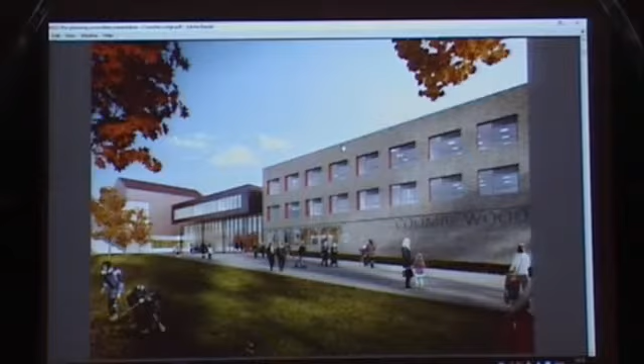Just to point out, there is a model that's been brought along. If the chair is agreeable, I suggest the applicant gives their presentation and then one of their team can talk members through the model itself. I'd ask that questions are delayed until members sit back down, because it's a public meeting, so everybody in attendance can hear the questions, if that's okay, Chair.

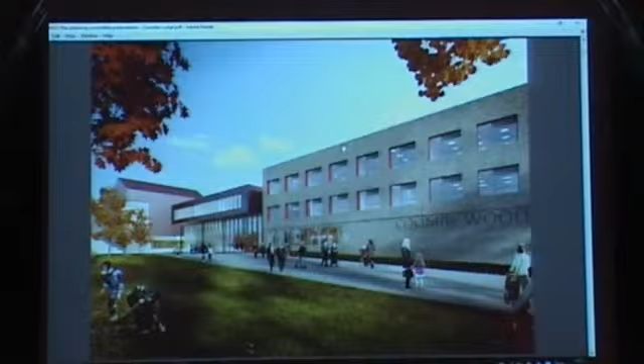But before I hand over to Sophie, I wanted to briefly put on the table the context for this. This is a journey we embarked on before Christmas. We've had a series of client engagement meetings which have been very instructive in terms of the finished presentation. We've been before the PRP, received their feedback, and had a series of pre-application meetings with your highway design and transportation officers. We've met with Sport England, and as Ross referred to, we had a fairly good public drop-in event last Tuesday, and we're still distilling the responses from that.

But tonight's a key step forward. We really want to hear how you view the proposals, and that is another step in the direction of putting a final scheme forward for planning. So, Sophie, over to you.

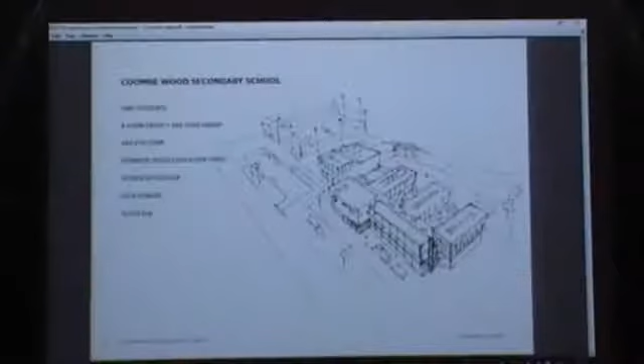The proposed school will have just over 1,600 students. Its sixth form entry will be 480. Each form, there will be 8 forms per year with 240 pupils in each year group. The sponsor is the Folio Education Trust, and there's a distinct specialism of sport on the site.

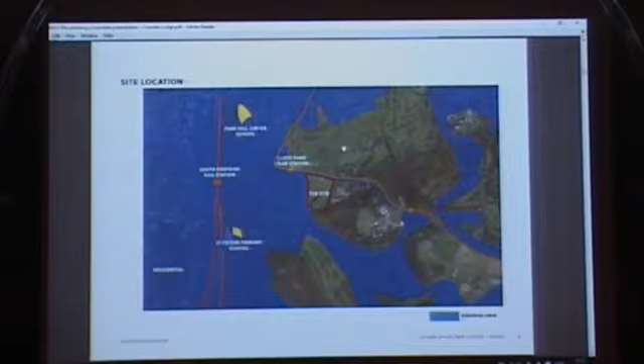I'm sure you're well aware of the location. As you can see, it's just southeast of the Lloyd Park tram station. There's some information here on the analysis and opportunities - we will dwell on this a little later.

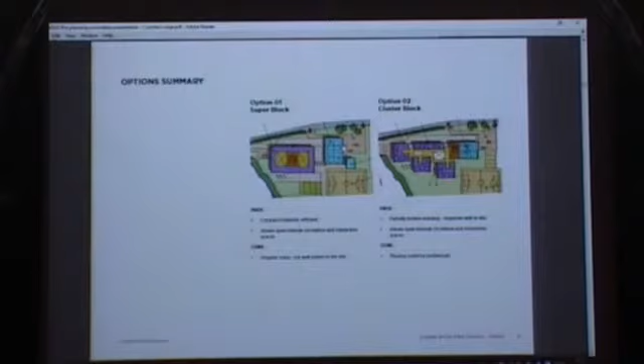Before Sophie talks about the detail of the proposal, we thought we'd just look at the process so far and the options that were considered during that process, including the super block and the cluster block. We ended up with north-south orientated, what's called finger blocks, with the main classrooms orientated north-south, with south-facing courtyards. So we looked at a whole raft of options before alighting on option 3.

The principles are, with south-facing courtyards, the blue denotes the principal teaching spaces orientated north-south. The communal facilities are rendered in orange on this diagram, including the sports pavilion, the main hall, and the refectory. We've organised vehicular access with cars to the east - top right-hand side - including drop-off. Pedestrian flow is principally from the west, from the tram stop, with a small amount of servicing vehicles also from the west. Those are the general principles of the school.

If we flip back, one more key consideration was to ensure - next slide please.

Okay, so that's lively. Can we? Left, back. Back one. That's it.

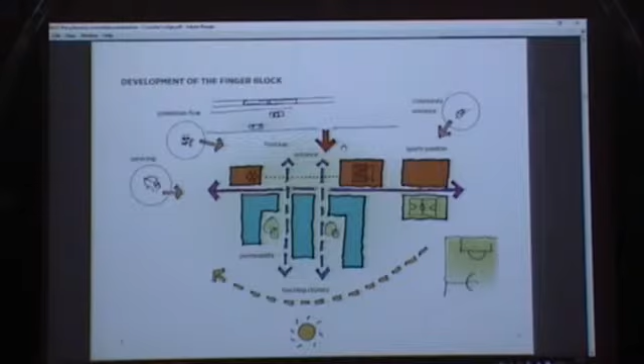This is our diagram of the organisational concept behind the school and our analysis of how the school is built up that way. And in detail, Sophie?

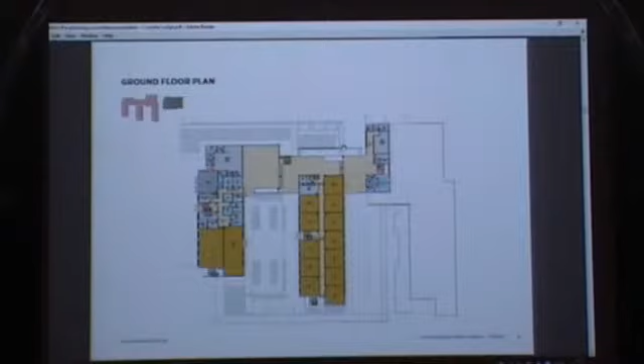The building responds organically with the site levels, both internally and externally. The first finger to the west of the site is 3 stories, and to the east is just 2 stories. The configuration of teaching rooms is on a double-stack corridor, so what you see in yellow are teaching rooms. The main spine, which aligns with Coombe Road, deals with circulation and atypical areas like dining on this floor.

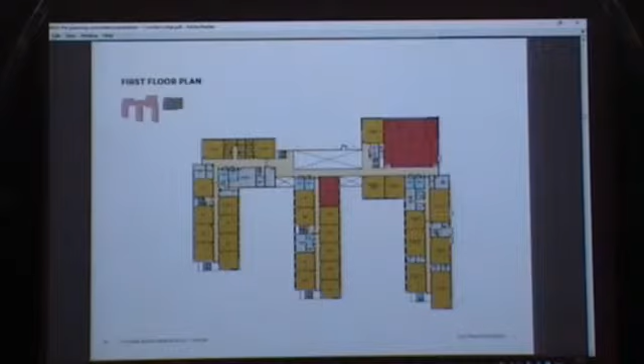Finally, the first floor, again you see the repeat in the plan, and these are a continuation of the generic teaching rooms and science rooms on the middle and east wing.

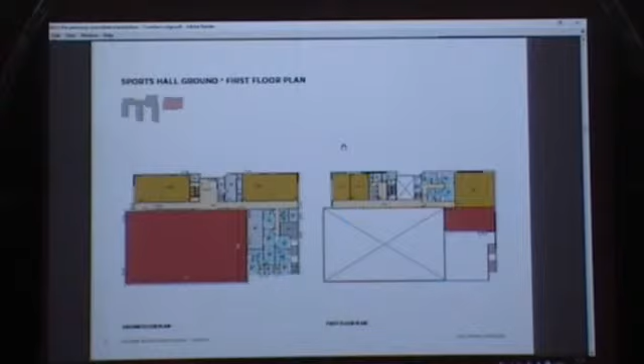We have 2 buildings on the site: the main school and the sports pavilion. The sports pavilion is 2 stories, with a centrally located entrance and a 5-court sports hall, double height, with associated spaces like fitness suites and studios and changing areas to the southeast.

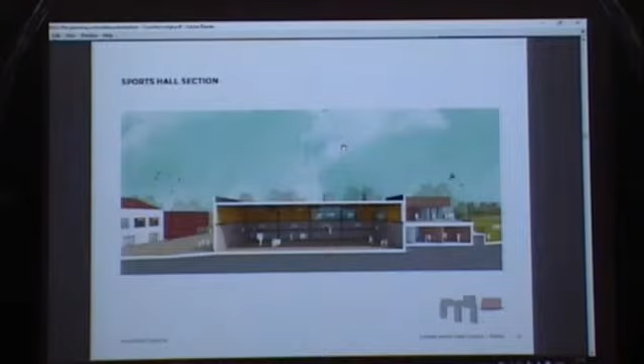The next slide is a quick pictorial section of the sports hall, and the slide after is a long section on the west, taken from the sports hall, cutting all the way through the school, where you can see how we respond to the site levels.

In terms of the material idea for the school, the principle of brickwork is adopted for the main teaching spaces, the classrooms. We have the notion of celebrating in a civic way the larger elements that face north, so the main hall and the art rooms you see in the middle of the plan are also celebrated in kind of autumnal tones.

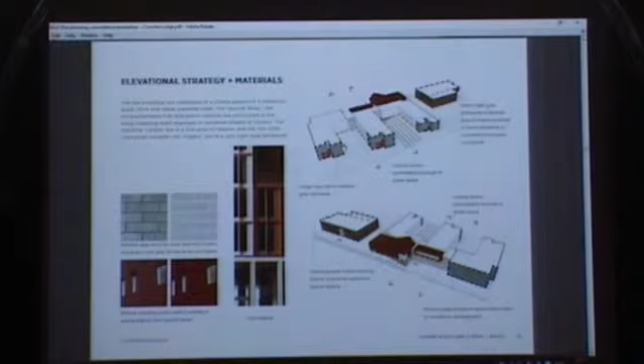That's in a ribbed metalwork, as is the sports hall to the left of the main hall. We responded well to the design review panel's comments about using render on the scheme, which we had at that point. The whole scheme now, apart from what you see in autumnal metal, is brick, so the courtyards are now in brickwork, which we think is a good positive reaction to that.

Some of the elevations: the upper one from Coombe Road looking south, and then from the playing fields below, looking north. Some of the sections in development, again you see, as Sophie described, the reaction to the topography of the site. We think we've been very responsible in that.

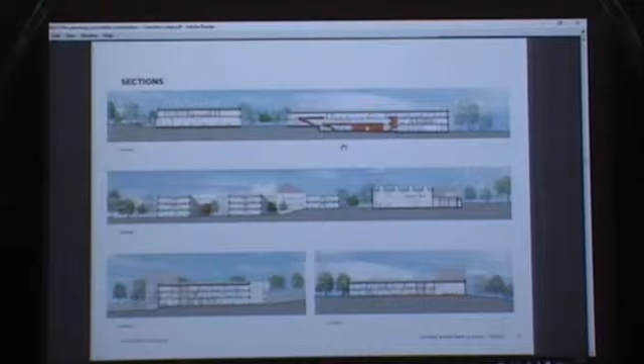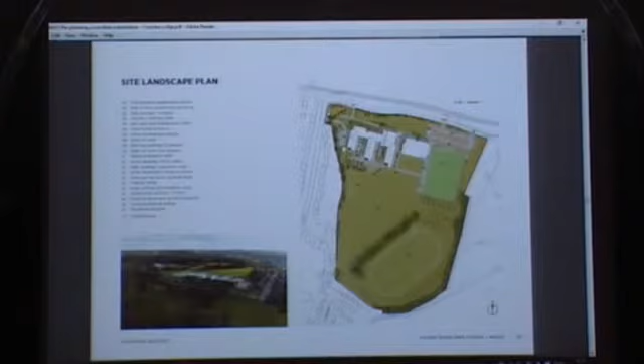So on to circulation. We expect most people to come from the west. The main path, through the broad strip at the front of the site, is a large path which grazes the front of the building and provides access to all the main destinations, both to the school and to the community facilities.

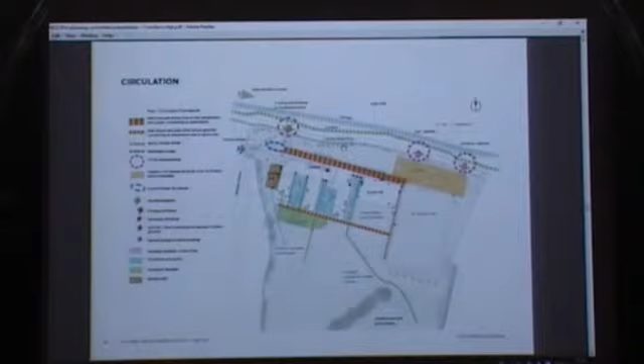And then we have a framework of circulation paths behind the school which support the school's internal circulation. Next slide, we have a secure line across.

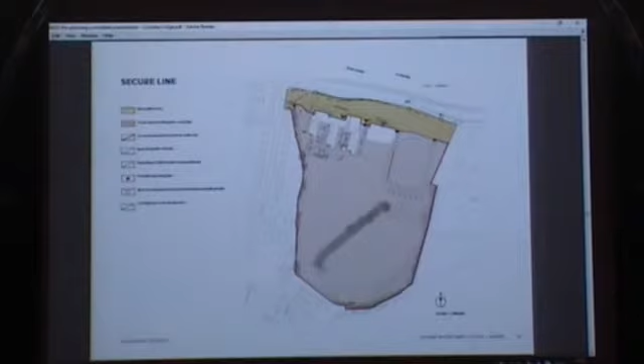The secure line is mostly formed by the buildings and the football pitch, the 3G football pitch, and then we have a fence around the periphery of the school as well, 2.4 metre high fence. So we have public space at the front of the site, and then it's secure, belonging to the school behind that line.

We have a hard landscape strategy which has a hierarchy of materials, so most of these sort of higher quality materials are concentrated on the front of the site, and then we have lots of different tarmac finishes at the back of the site. We have a SUDS scheme in the car park, so that's permeable paving.

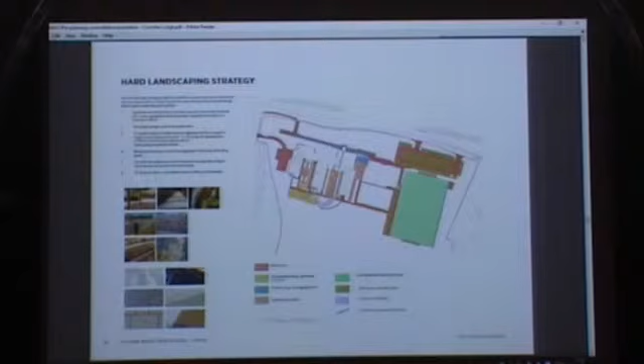The soft landscape strategy is, at the front of the site we sort of mirror Lloyd Park, and then we have lots of planting in the courtyards which create identity and create smaller areas. There's also habitat around the edges of the site.

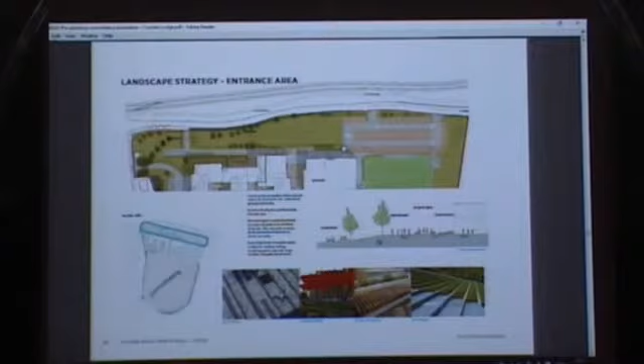This zooms in on the front of the site, and you can see that path running across it, which is quite an important part of the design in that it's intended to serve both the community facilities and the school equally. So you have small reception spaces at each of the main entrances.

Good evening, everyone. I'm going to speak about transport and highways for a few minutes. We're fortunate through the process to have received data on expressions of interest from families in the local area who want to send their children to the proposed school, and this has helped us to understand the catchment area and how that relates to the accessibility of the site.

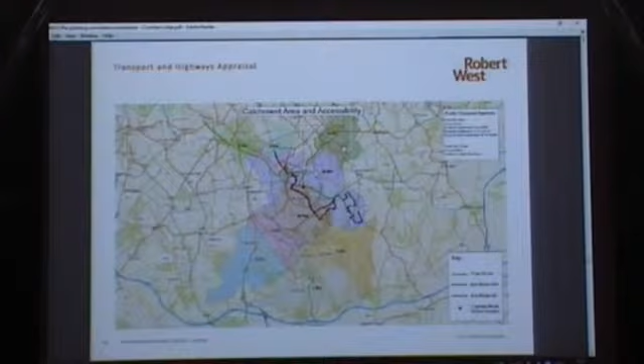This diagram shows that the majority of pupils will come from these 2 postcode areas, which are CR0 and CR2. It also shows how they're well served by the tram lines in green and bus routes in red and black. This plan shows more detail in relation to specific postcodes, with the site in the middle.

Interestingly enough, since this data was received, the school has allocated places for 2018 when it's in the temporary accommodation. And due to the school being oversubscribed with a distance-based admissions policy, all the pupils coming in September will actually be from within 1.2 miles, which is very local and could be considered for walking. But generally speaking, this shows a trend along those tram and bus lines as well for pupils living a little bit further away.

In relation to public transport access, it's been mentioned in the officer's report and on several other occasions that the site has a low PTAL. So I thought I'd pick up on some information available from Transport for London, which shows what this means in this location based on the services available for journey times. So the site is shown here, surrounded by red, which is up to 45 minutes journey by public transport, and surrounded by yellow, then up to an hour.

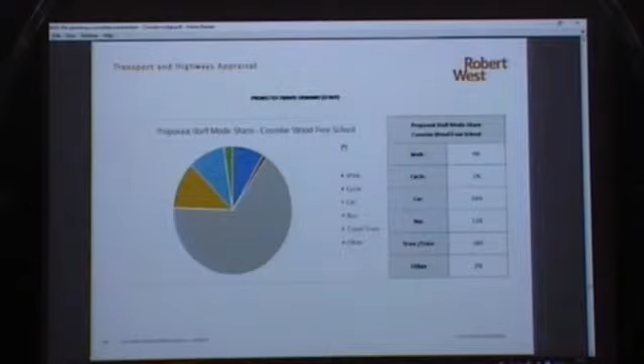In relation to staff, we've used data from the local area, how people in the Croham ward are currently travelling. Conversely to pupils, it shows that the majority of staff travel by car. Again, this is the baseline, and we would encourage, particularly on the basis of public transport accessibility and journey times, staff to travel by bus and tram in particular.

We're aware of and have been advised that there are many other local schools in the area, and this has an impact on travel demand on the network generally. The 2 feeder primary schools are shown here, St Peter's and Park Hill, but there are also other schools nearby on Melville Avenue close to the school, and Cedars and Royal Russell.

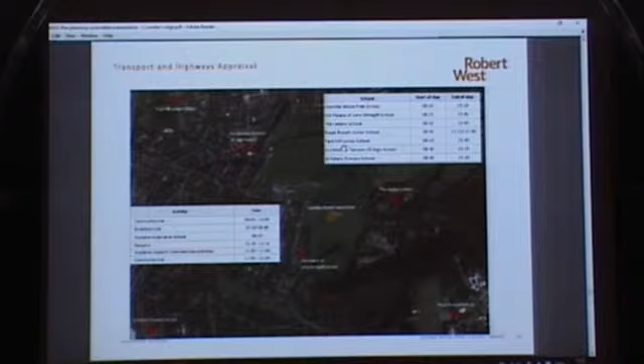The school timetable has been developed in cognizance of the other timetables in the area, and where possible there's a staggering between the start and end of the school day of those facilities in order to try and manage travel on the network as a whole. Also, particularly due to the sports emphasis in the school and the extra facilities it will have, there will be a big emphasis on enrichment before and after school. So within the school day itself, pupils will be arriving and departing on a staggered basis, which helps to smooth travel behaviour in the peaks.

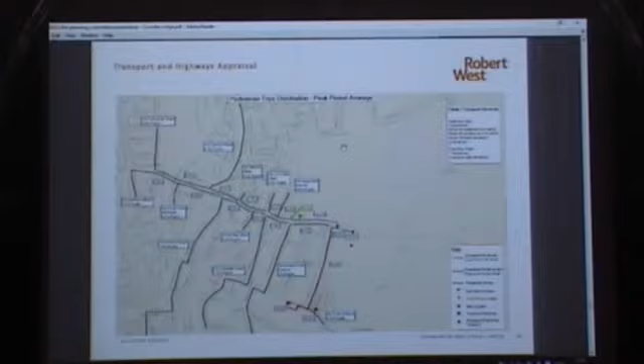Through the expression of interest data that I mentioned, we've been able to assess how pupils may approach the school on foot, including how they may approach having alighted the tram and bus routes. This diagram shows that. I appreciate it's a little hard to see, but the bus route journeys are shown coming up Melville Avenue and the tram shown in green. The conclusions of this exercise really are that there is going to be a large amount of crossing demand from pedestrians on Coombe Road, and that has influenced our transport strategy.

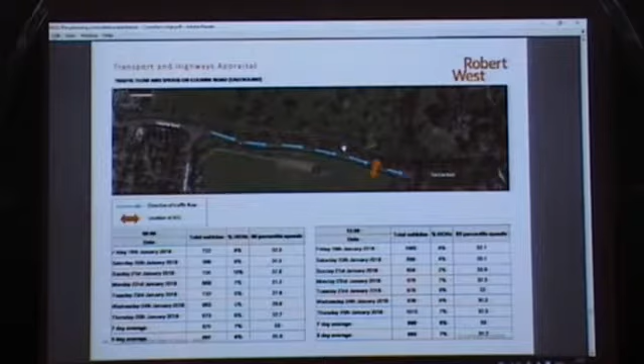I'll quickly flick through these slides. It's just to acknowledge that based on our site visit observations, what we've been told, and from survey data, we are aware that there is a heavy traffic volume east and westbound on Coombe Road, and also speeds in excess of the 30-mile-an-hour speed limit, and that's also influenced our transport strategy.

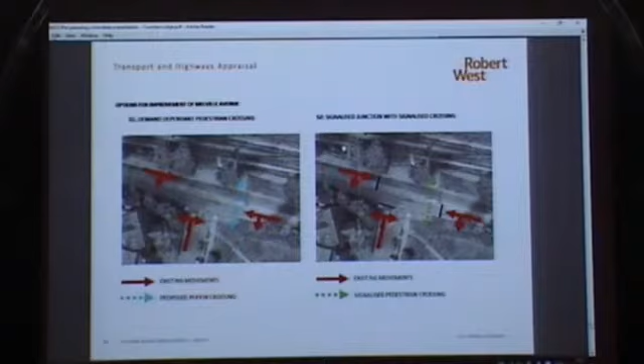So really, in our proposals, we're seeking to bring forward improvements that firstly manage or address the impact of current traffic conditions on pedestrian safety, and that's what's shown in this plan here, which has 2 options, 1 and 2, for pedestrian crossing facilities on Coombe Road.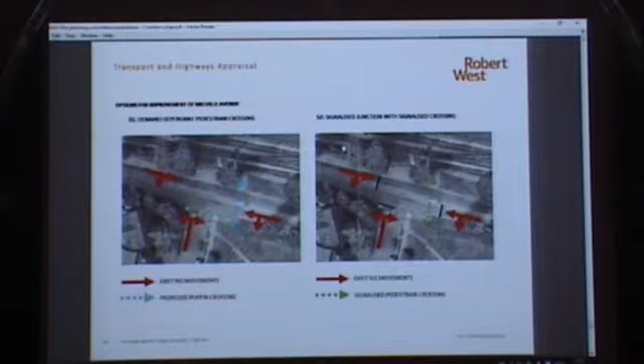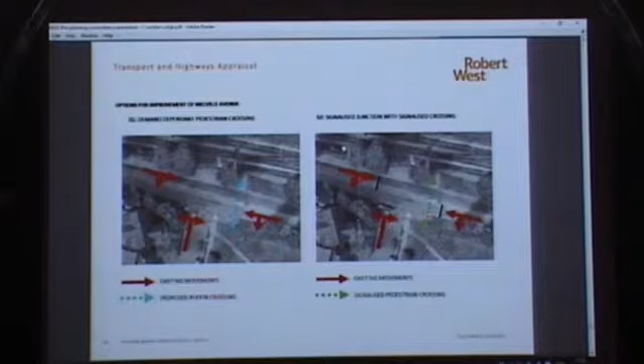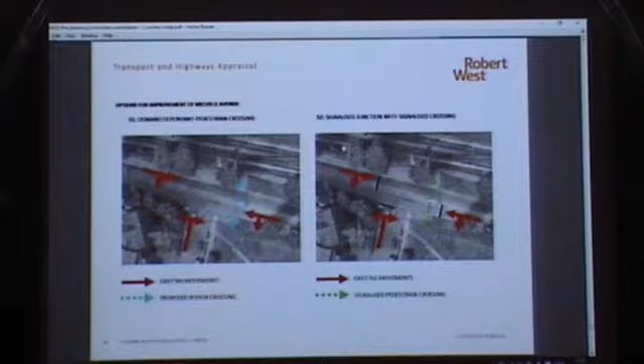This proposal here is a standalone push-button Pelican crossing to the east of Melville Avenue, with otherwise no other changes to traffic movement at Melville Avenue. This second option is a signalised junction, including the same crossing facility on Coombe Road, but signalising the other arms of this junction as well. I feel overall the signalised option probably does provide the best safety conditions, not only for pedestrians but for all road users, because it manages traffic demand through the signals.

Coming on to the wider strategy, which seeks to address the impact of the school itself on the network. As you may have picked up from the earlier slides, our access arrangements are located to the east on Coombe Road, and they're separated between inbound and outbound.

The vehicle accesses are segregated from the pedestrian access and from the Melville Avenue junction to reduce the interaction between those two locations. We're also looking to extend the footway on Melville Avenue to connect with the pedestrian access. On this side, because there's a lot of pupils alighting the tram, we're looking at improvements. Coming back to my earlier point about improving conditions for cyclists, we are considering that at the moment because we acknowledge it would be of benefit.

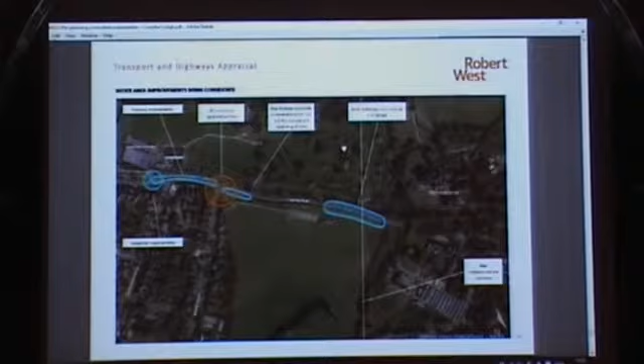Some of the things we're considering are advisory cycle lanes on Coombe Road, Croham Road and other connections. But we need to balance that against the actual conditions on the network and whether it would reduce levels of service.

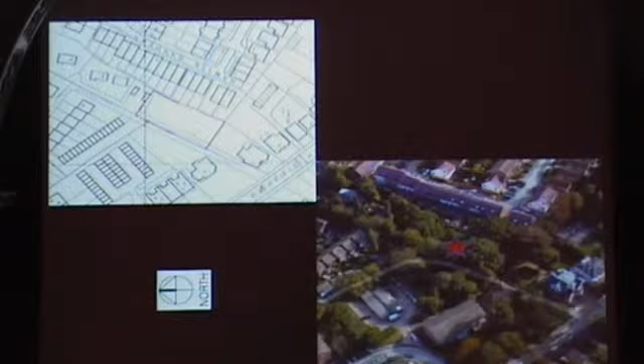So moving on to the floor plans and the block plan.

All of the proposed residential units would comply with or exceed the minimum space standards, and each unit would have a parking space, cycle storage and sufficient refuse storage. Being dual or triple aspect, all of the units would receive sufficient natural daylight, sunlight and natural ventilation.

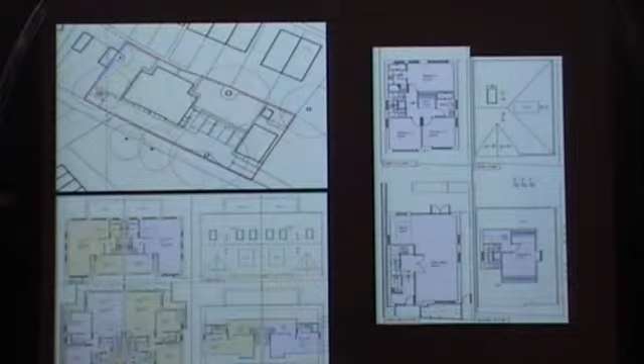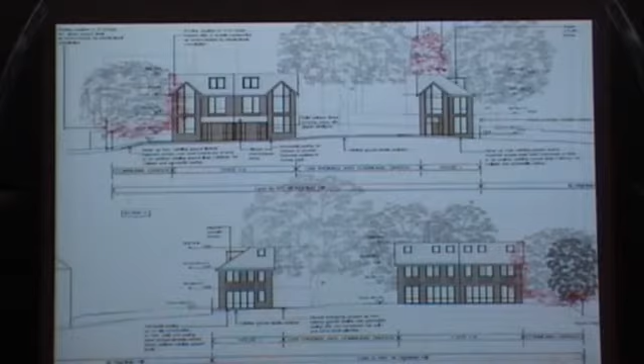Officers considered that the proposal would have an acceptable massing, design and overall appearance, and would respect and not appear out of character with the surrounding area.

Next, we have the side elevations and sections giving context of the site and its location to neighbouring properties. Although separation distances to Hamlin Gardens are slightly less than the common practice of 18 to 21 metres in terms of privacy and overlooking, officers consider that the proposal would not harm neighbours' living conditions to the point that it should be refused.

The reasons for this are that the separation distance, generally a minimum of 16 metres, is sufficient to avoid a significant amount of overlooking. There is also a difference in land levels, existing and proposed landscaping, and boundary treatment that would all serve to reduce the direct harm that might arise.

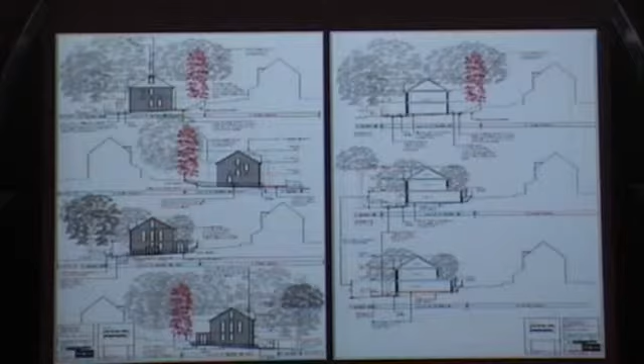There are also a large number of trees on the site, which would be retained, providing further screening between existing and new properties. Finally, there are some sheds or small outbuildings in the rear of particularly the Hamlin Gardens properties, which again provide a buffer between the proposed and existing dwellings in the area.

To conclude, officers' recommendation is to grant planning permission subject to the conditions listed in the committee report. Thank you, Chair.

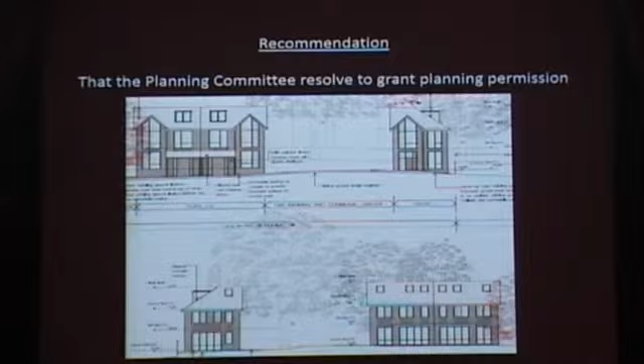Questions for clarification? As the report states, planning consent was previously agreed on this site for 2 houses. I think you may have up your sleeve somewhere a rather faint drawing showing what was actually approved previously. Could we have a look at that? I think that's an important consideration.

Thank you, Chair, apologies, it is rather faint. This was granted in 2000, almost 20 years ago, so we don't have electronic copies and have had to use a scanned version which hasn't come out particularly well. I wanted to include this in case this question arose. As the officer report notes, the site does have a lapsed permission from 2000 for 2 buildings in a similar location on the site, albeit at different angles to the current proposals.

Thank you very much. Any further questions? Councillor Brew? I note you say the distances are a little less than optimum in terms of overlooking. Are there any windows actually overlooking each other within the site, or overlooking neighbours in either direction?